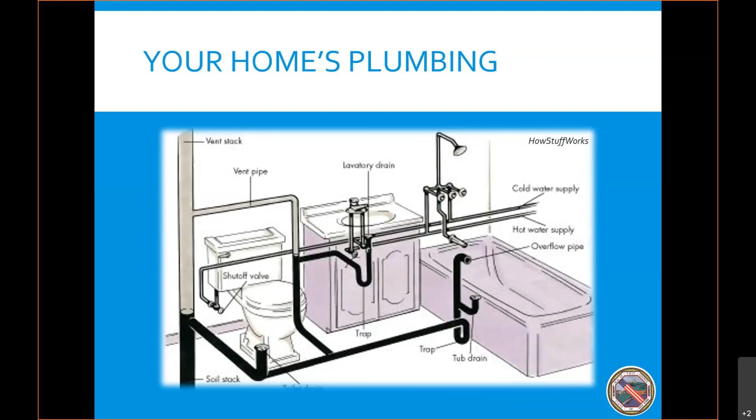The used water is collected through a drain system. The drain system, shown in black on the figure here on the screen, is a series of pipes from all of these sources that combine together into a single, slightly larger pipe that exits your home. That single pipe that exits your home is referred to as your house or sewer lateral, which is shown in this figure exiting in the basement area of the home.

How many of us have spent time thinking about their sewer lateral? If you haven't had any problems with it, most probably spent 0 time thinking about it. The lateral in most municipalities is private, meaning that it's owned by the homeowner, and that's because it services a single residence. In modern days, that sewer lateral is typically connected to either a private septic system or, for most of us, a public sewer system.

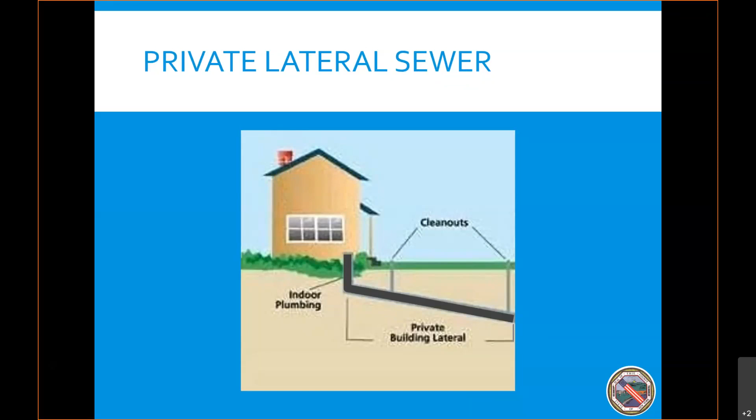That is in today's world, but before I go any further, I'd like to go back 167 years. In 1854, London had an infamous cholera outbreak that forever changed the course of health and science. At the time, experts were not certain of the cause of the cholera outbreak in the city. Due to the stench in the area, it was theorized by some that the disease was airborne.

It was not until Dr. John Snow meticulously traced the cases of cholera and observed certain patterns using his information gathering and mapping techniques that the epidemic was better understood. Dr. Snow had figured out there was a tie with human waste and drinking water sources.

The famous removal of the handle of the Broad Street pump, still memorialized in London today, was a major way of fighting against the epidemic and is often cited as the start of what's referred to as the sanitary revolution. Many consider Dr. John Snow the father of epidemiology.

And that does not include other diseases that are typically waterborne, such as dysentery and typhoid fevers, or those that were classified as unknown at the time. The 520 deaths equates to approximately 0.7% of the entire population dying of a single disease in a single month. In today's numbers, that would be over 6,400 people dying of the disease in Erie County in a 30-day period.

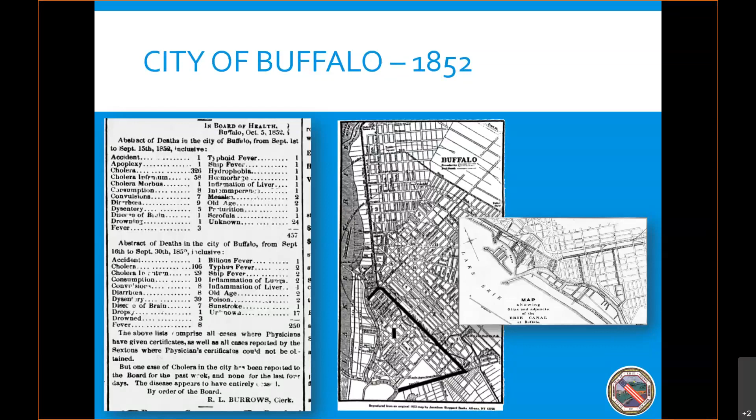This is all because societies had grown and were living in closer quarters. With these large concentrations of population, proper protections from pollution associated with human waste had not yet been enacted. But getting back to that private lateral I referred to earlier, with advances in the understanding of disease, in the late 1800s, it was determined that the waste from homes needed to be redirected away from water supplies.

That was the start of sewer systems, a network of pipes that collect the flows from individual properties and take them to another location. In the early days of sewers, oftentimes those collected flows were directly sent to streams and rivers. Water supply locations were then strategically selected to be away from these discharge points, the best they could. It was a common thought that dilution could be the solution to pollution.

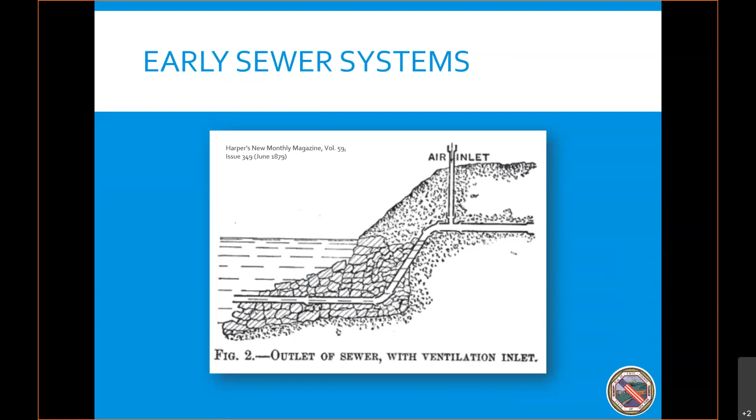But while that's a catchy rhyme, dilution being the solution to pollution only went so far. As populations grew, the concentrations were such that waterways were highly impacted. In the early 1900s, the city of Buffalo was cited as the main source of intestinal disease in both the United States and Canada downstream of the city along the Niagara River and heading towards Lake Ontario.

In 1907, the city of Niagara Falls had the highest death toll of typhoid fever in the world, which was attributed primarily to the growth of the city of Buffalo. Think about that. That was in the 20th century, not very long ago at all. Pretty incredible. There were disputes because of these impacts.

Can you blame people? And to the point where King Edward VII of England, representing Canada, and President Howard Taft, representing the United States, signed a Boundary Waters Treaty to address these types of issues. The result was the formation of an International Joint Commission to study and enact policies regarding these shared waters. The commission is still in place today.

One of the main advancements locally to improve the shared waters was the formation of the Buffalo Sewer Authority to capture those direct discharges to waterways and provide a basic level of treatment. The primary focus was disinfection.

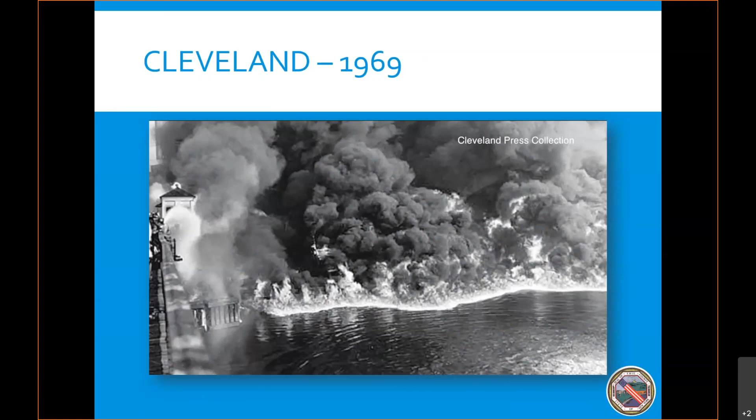The Cuyahoga River was not the only water body to catch fire. Although less publicized, the Buffalo River also caught fire in 1968. There was so much oil and grease on the river that a worker accidentally ignited that blaze with a workman's torch. This wasn't a brazen act of vandalism or anything intentional. It was simply the conditions were so awful that a normal activity could cause the fire.

That same year, the Federal Water Pollution Control Administration described the Buffalo River as a, quote, repulsive holding basin for industrial and municipal wastes, unquote, and essentially that it was devoid of oxygen and almost sterile. This reputation started to become more publicized a few years earlier when President Johnson visited Buffalo in 1966. At the meeting, President Johnson was presented a bucket of sediment and of water from the Buffalo River and was given a big spoon to stir it with.

Can you imagine that being done with the president in today's age? When that occurred, Mrs. Johnson recoiled from the smell, and the president was disgusted. LBJ's response was fairly simple. Don't worry, I'll take care of it. The same year, Senator Robert Kennedy toured the Buffalo River and was quoted as saying, "This is as bad as anything I have seen."

Of course, the Buffalo River connects near the terminus of Lake Erie, and poor Lake Erie. In the 1960s, several national publications declared Lake Erie dead due to toxic algal blooms that had depleted oxygen and would not allow fish to survive. It was so bad that when Dr. Seuss wrote the Lorax in 1971, of all things he could have chosen as an environmental problem, he used Lake Erie as an example.

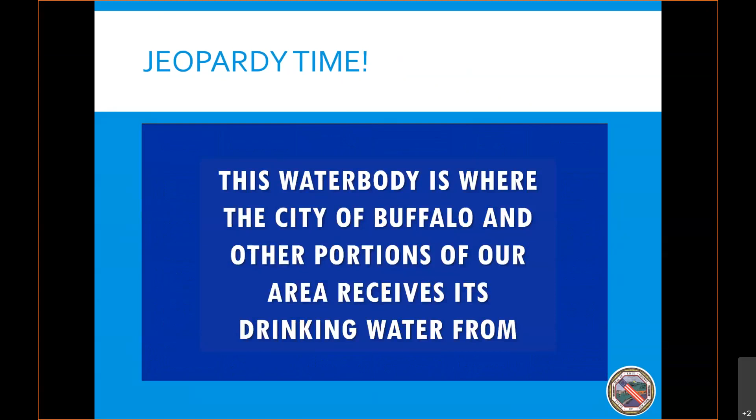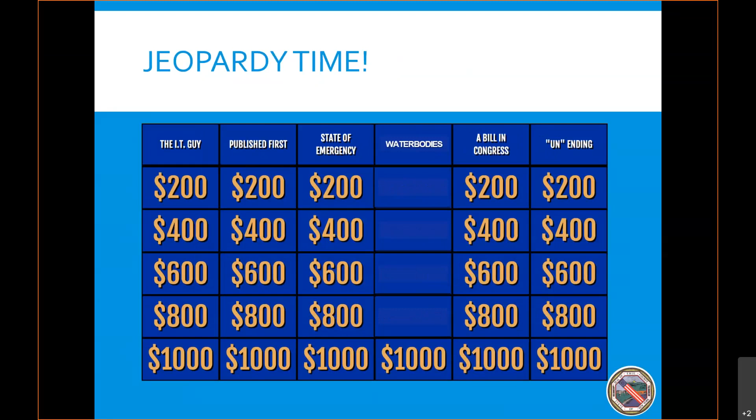How about water bodies for 800? Evangola and Woodlawn Beach State Parks are located on this water body. Starting to notice a pattern. Let's close out the category, water bodies for 1,000. Chris Hoover of Fishing League Worldwide stated this water body was the #1 smallmouth bass fishery destination in the United States. Even if you do not know Chris Hoover or Fishing League Worldwide, hopefully you can answer this one based on the previous questions. The answers of all of them were Lake Erie.

Our county is named after it. It is our drinking source. It is critical to commerce and economic development. It is used for beaches and recreation. It is a world-class fishery. It is amazing that in the 1960s and before, we allowed this tremendous asset to deteriorate into such sad shape.

By the mid-1960s, momentum had been swinging to address these problems. During President Johnson's previously referenced visit to Buffalo, he committed to quick and decisive action to save the Great Lakes. During a rally in Niagara Square that day, he was quoted as saying, "Lake Erie must be saved. This great inland sea will sparkle again." The decisive action came after LBJ's presidency with the passage of the Clean Water Act.

Quoting portions of the act directly, the Clean Water Act's stated goals were to restore and maintain the chemical, physical, and biological integrity of the nation's waters, that the discharge of pollutants into navigable waters be eliminated, foster the protection and propagation of fish, shellfish, and wildlife, and provide for recreation, to prohibit the discharge of pollutants in toxic amounts, to provide financial assistance to construct publicly owned waste treatment works, develop and implement area-wide treatment management planning processes, initiate major research and demonstration, and develop programs for the control of non-point sources of pollution.

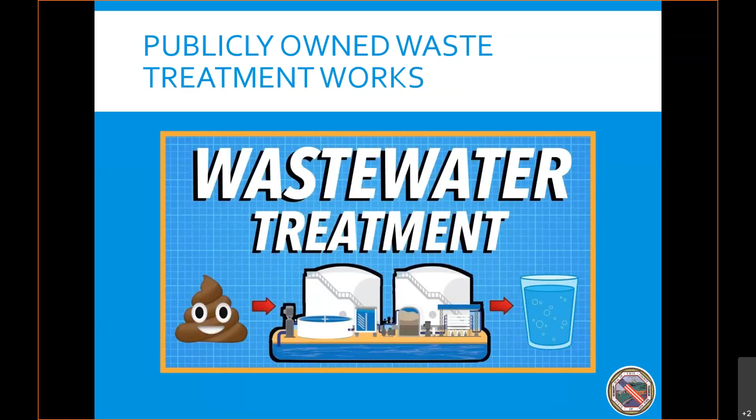Wastewater treatment plants are, quote, pollutant discharge elimination systems. The New York State Department of Environmental Conservation, or New York State DEC, issues state pollutant discharge elimination system permits to these facilities. And the permits are limitations that the facility must meet. Those limitations are determined by the New York State DEC, so the facility protects the uses of the water body it is discharging to. So, for example, you do not want a treated effluent from a wastewater treatment plant that is too acidic or too basic.

Therefore, one parameter that is monitored is pH, and the pH must remain between certain numbers. The limits are typically a pH of 6 to 9, with 7 being neutral. Another example, phosphorus was a key item included in many permits, particularly those discharging to the Great Lakes, because phosphorus was determined to be a main culprit to toxic algal blooms that had plagued Lake Erie for decades. For most large facilities, a limit of 1 milligram per liter for phosphorus has been set.

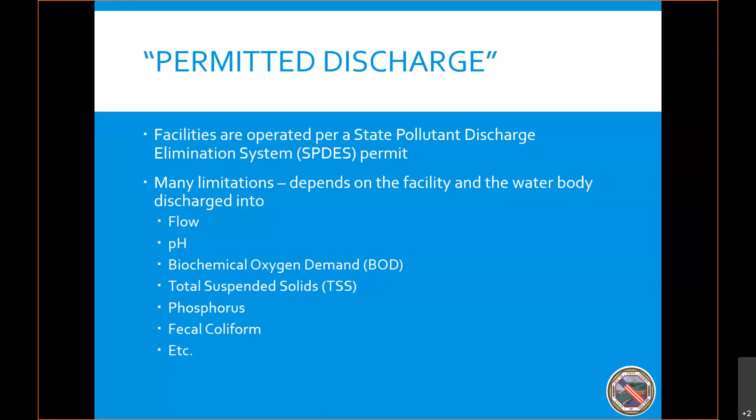There are numerous other items that are tested and monitored at these facilities. Simply put, these plants eliminate pollutants they receive. The permits enforce the Clean Water Act standards, are designed to protect the use of the receiving water, and the permits are what the facilities use to govern their operation. So what does it take to eliminate that pollution? In short, it is a complicated step-by-step process. Each system or facility is a little bit different, so for the purposes of this presentation, I'll provide general or typical examples of how these processes work.

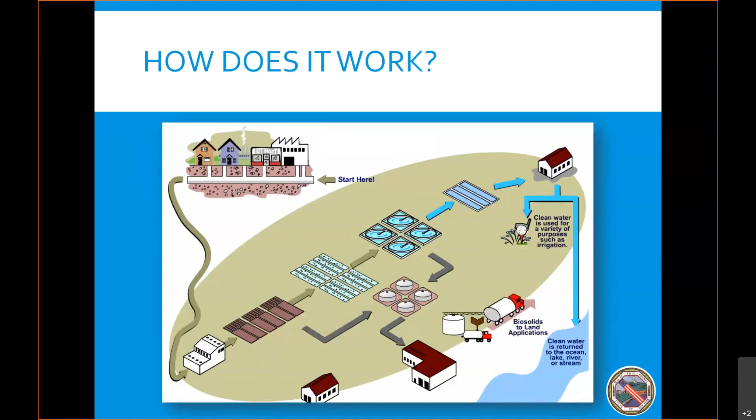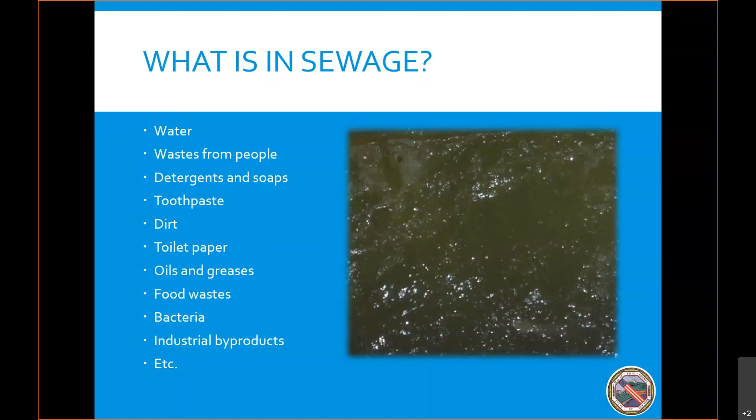Some people may ask, what exactly is in sewage? Well, here's a partial list. Primarily, there is water, and that is what we attempt to recover from this waste stream. There's the other stuff: waste from people, toothpaste, toilet paper, oils and greases, bacteria, industrial byproducts. Those are the items that could potentially harm our waterways and what is removed or eliminated through the treatment process. So what happens after you flush? Well, first, that used water coming from the private laterals is collected through a sewer system.

In most municipalities, there are two types of sewer systems in the road. One is referred to as the storm sewer system, which collects stormwater from the streets and other areas and conveys it to waterways. The second type is the sanitary sewer system, which is what your home's private lateral connects to and separately sends the collected sewage or wastewater to the treatment plant. There is one difference in Erie County. Within the city of Buffalo, there is what is referred to as a combined sewer system. What that means is the same pipes handle both storm and sanitary services.

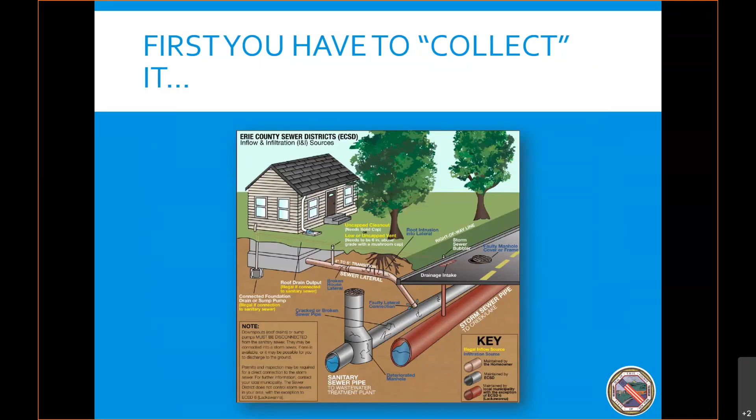The sewage within sanitary sewer pipes generally flows by gravity. What that means is the pipe is gently sloped downward, with the sewage flowing from the higher point to a lower point. To provide access to the gravity sewer system, there are manholes in the streets. As these pipes combine with pipes from other areas, the sewers become bigger and bigger.

For those on the computer, what I'm going to do now is show some video footage from televising work we perform in the sewer systems. Yes, we do send video cameras into sewers. In fact, these cameras can cost over $100,000 to procure. We have a crew that is on the road almost every day performing televising work to assess the condition of our sewers, see if there are problems, and more. There's not anything remarkable about this particular sewer section.

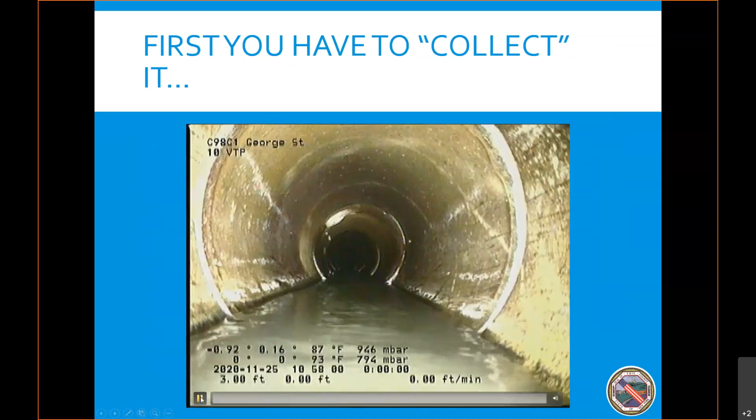It is a 10-inch diameter vitrified clay tile sewer, a pipe material that is hardly used at all anymore. I believe this sewer is approximately 70 years old. So just let me hit play here. So the camera is actually on crawler tracks. It almost looks like a tank as it's going through the sewer. The camera operator can pan and tilt and zoom in on different features depending on what they're looking at.

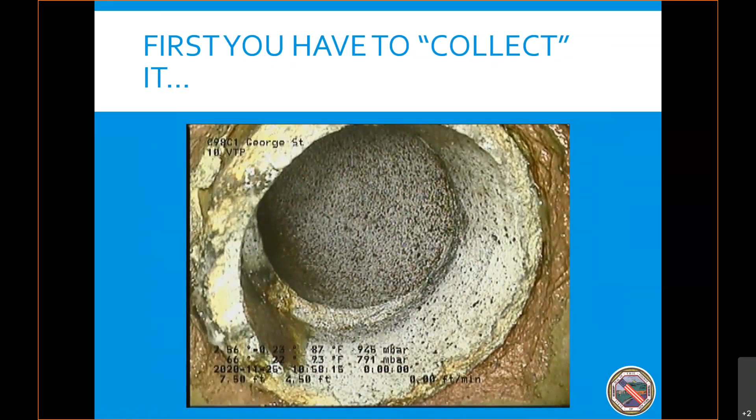So for those looking on the screen, you'll note that the camera operator has classified this as a tap break-in inactive at 10 o'clock, 10 o'clock being the location of where that tap is. I'm going to pause this video here for just a second. On the right-hand side of the sewer, you can see there's some things that are sticking out of one of the joints of the pipe. Those are actually tree roots.

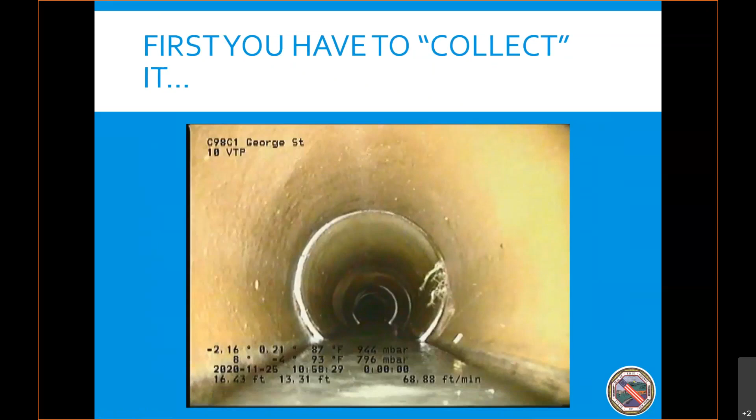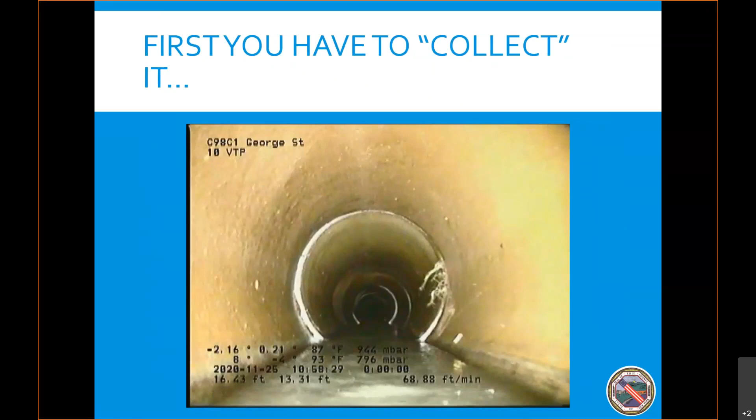Tree roots attempt to find water, and of course there's a continuous water supply in sewer systems. In this instance, those are very, very minor and really aren't of concern to us, but there are times in which tree roots can completely block the entire flow. And we actually have specialized equipment that can be used to remove those tree roots and make sure that they don't cause further damage. So see the camera continues to move along. If there are any cracks or sags or collapses, the camera operator would be noting that.

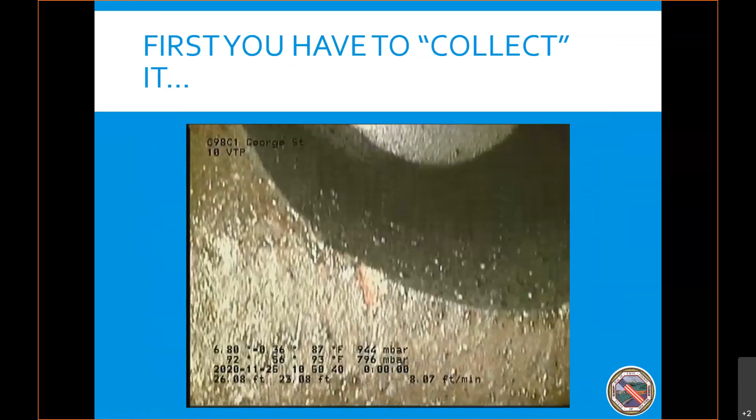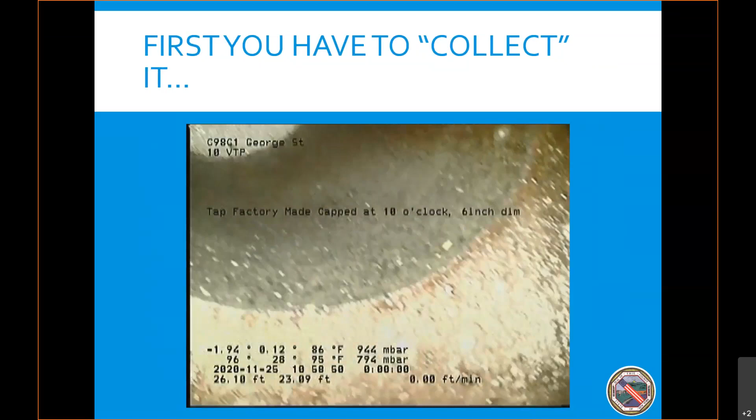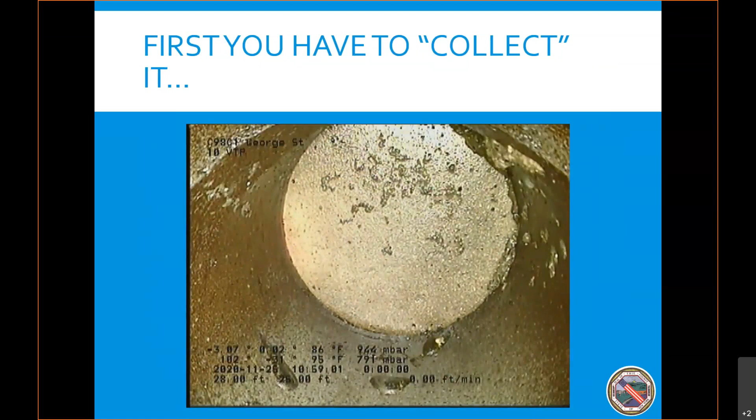Next, we panned and tilted up to another potential feature. In this instance, this is referred to as a factory tap, and it's capped, meaning that it actually is not connected to another home. Same thing on this location. If the cap was not there, or if it was leaking, we would note that, and we'd come back and perform a repair on the sewer at that location.

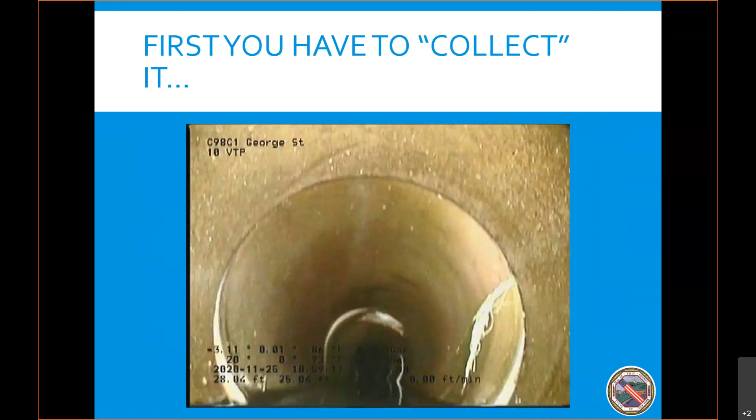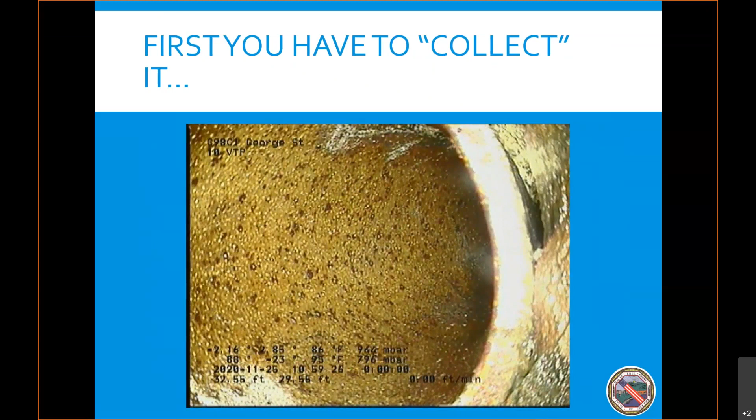Coming up, you can already see another minor root, followed by another connection here. This is actually an active connection because you see there's a pipe that you can look further up into there. So our camera operator will note that that's an active tap. Hopefully we'll see that on the screen momentarily. Yep, right there. And it's at the 2 o'clock position on the pipe.

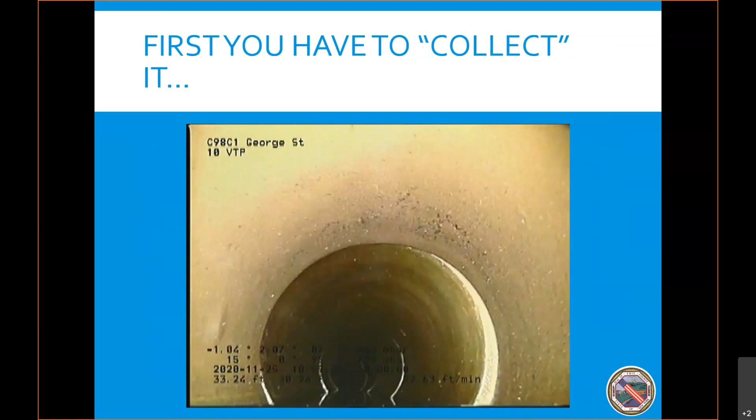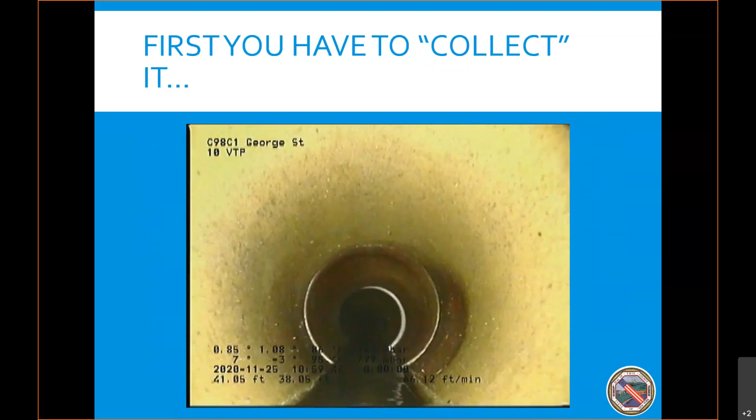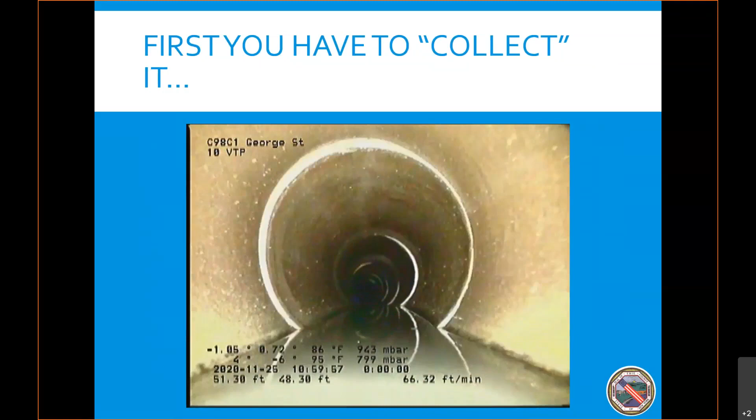Some other things that you note is that there are joints every roughly 3 feet as you're going through there. That's an older installation. Newer pipe sections are typically made of plastic, or what's referred to as PVC, and those joints are much longer than that. Joints are a potential area where there could be a failure in the pipe, also where we could have groundwater leaking into it, which is not a good situation at all.

Although the goal is to have everything flow by gravity, the natural terrain, creeks, and other geographic features sometimes make gravity flow infeasible. In those instances, the most common way to address it is by an installation of what's referred to as a pumping station. Think of a gas pump. There's a tank in the ground and a mechanical system to raise the gasoline to a higher level. Wastewater pumping stations also have tanks in the ground with pumps connected to them to move the sewage to either a higher level or another location. Unlike the gas pump, sometimes the discharge location can be several miles away.

The Erie County sewer districts are responsible for approximately 100 wastewater pumping stations scattered throughout our area. These facilities range in size from those that can pump relatively small amounts, say 20 to 30 gallons per minute, to those that can pump millions and millions of gallons per day.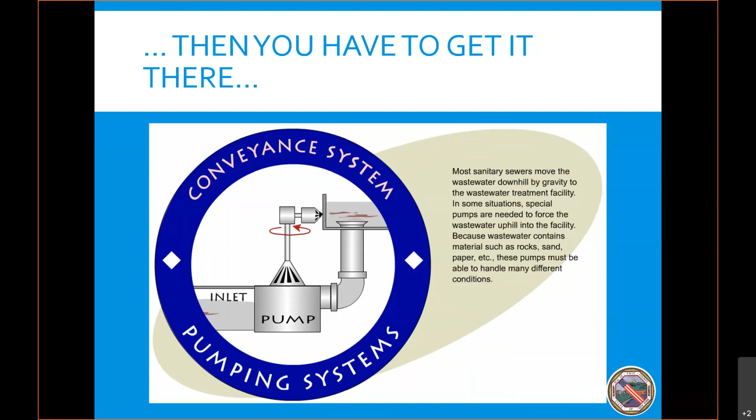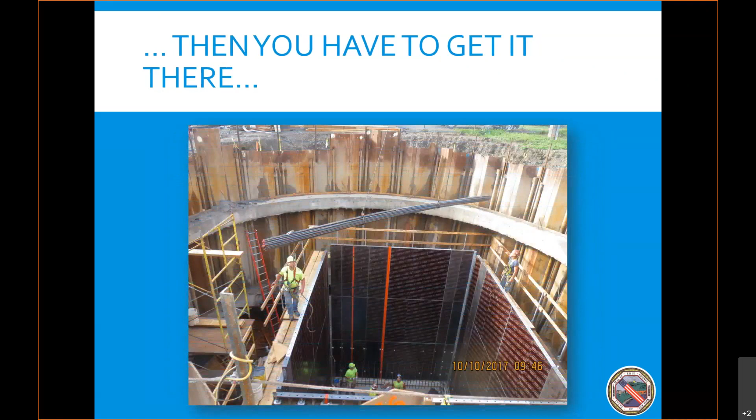This picture is from the construction of the facility. As you can see, an enormous hole needed to be dug, and quite deep, roughly 30 feet. You can tell by the perspective of the worker at the bottom of the hole in comparison to the length there. The main structure constructed here was the wet well for the pumping station. The wet well receives the sewage, and in this type of pumping station also houses the submersible pumps inside. 3 pumps are installed, as you can see, 1, 2, 3.

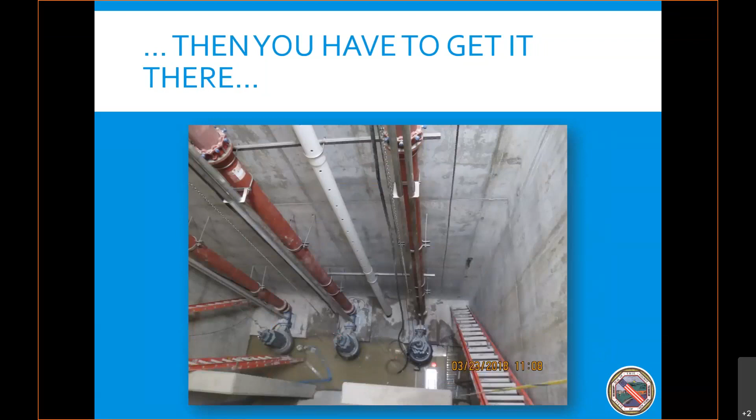And 2 of which are needed to handle the peak flows, and the 3rd is there for redundancy in case there are problems. Here's another view. The peak flow of these two pumps operating is approximately 4.6 million gallons per day, or roughly 3,200 gallons per minute. To put that in perspective, this station could empty an Olympic-sized swimming pool in less than 3.5 hours. This is not even close to the largest pumping station the county owns, operates, and maintains.

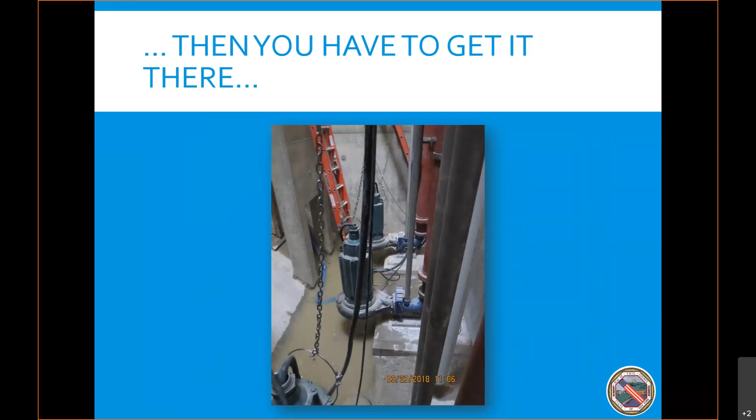In fact, one of the most challenging aspects of this construction project was this was a pumping station replacement, meaning wastewater service needed to continue despite the significant construction work occurring at the site. For those that may be asking, the total cost of construction for this pumping station was almost $3 million.

Once the flows make it through the sewers and pumping stations and enter the treatment plant site, the first step is what's referred to as preliminary treatment. Preliminary treatment removes large debris up front to protect the equipment within the wastewater treatment plant.

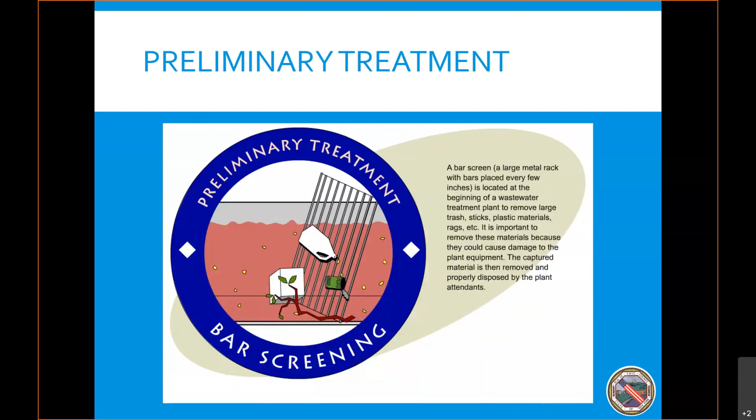Just cue up the video here. Here we go. Internet is going very slow right now.

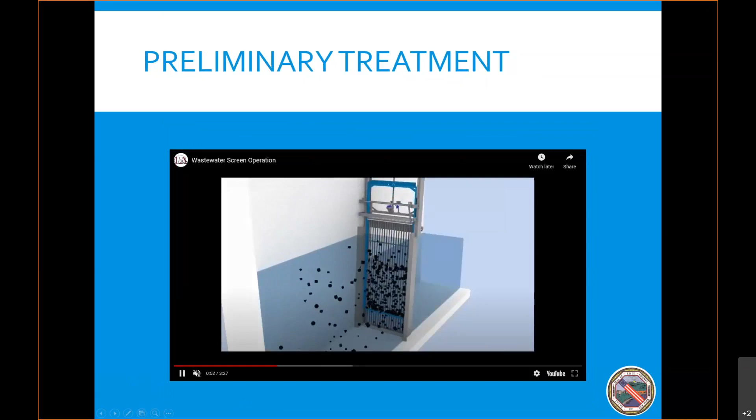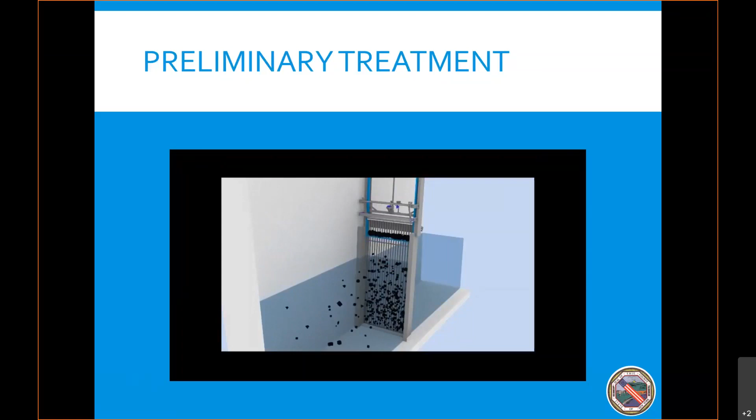There we go. This video provides a schematic of the most common preliminary treatment device, a screen. The typical screen configuration includes a series of thin metal bars placed in the wastewater flow stream where larger debris gets caught. You can see that by all the black specks on the schematic here. As the screen could be clogged, there's a scraper or rake mechanism that removes the debris from the screen so that there is no backup.

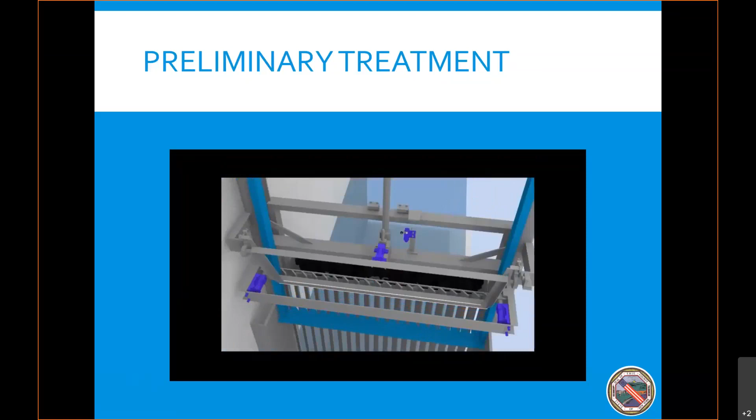The debris is typically conveyed into some sort of hopper or compactor, which I believe is going to be shown right about now. You see the debris is removed and goes into the hopper, and that is subsequently disposed of in a dumpster. And then the rake goes back down and removes additional debris so that it does not clog the screen.

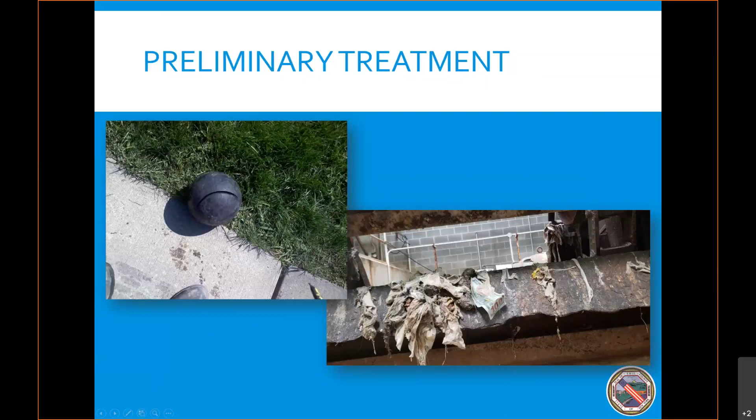After preliminary treatment, the next stage in the process is what's referred to as primary treatment. There are two main functions of primary treatment: to have solids sink to the bottom and to have oils, greases, and other floatables rise to the top. The solids that sink to the bottom, referred to as sludge, and sludge looks like it sounds, are disposed of through other processes in the treatment plant. Similarly, the oils, greases, and other floatables, also referred to as scum, and we have very glamorous terms in the wastewater business, that scum is skimmed off the top and also disposed of.

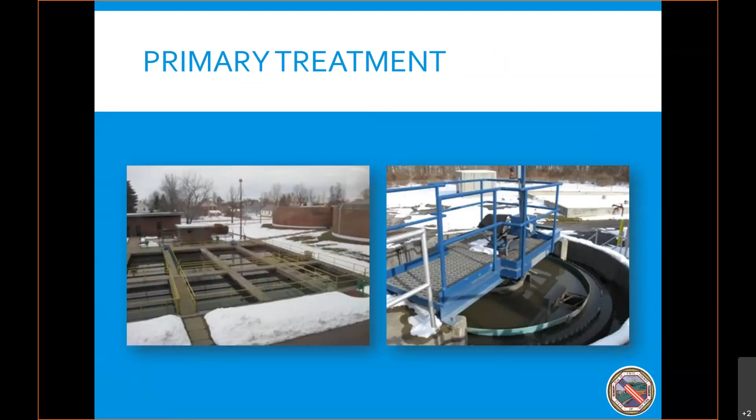The typical means to conduct primary treatment is with equipment referred to as clarifiers. They are essentially large tanks, some circular, others rectangular. On the surface, it does not appear that there is much going on. However, there is a significant amount of equipment that is required to optimize treatment. For simplicity's sake, I will focus on the circular style clarifiers.

Influent sewage enters in what's referred to as the center well, so it comes up through here. The flow disperses from the center, which you can see from the arrows on the figure. The tanks are sized for the expected peak flows and the expected makeup of the sewage to promote settling of solids. The solids settle on the bottom. On the bottom is a scraper mechanism to collect the sludge.

At the top is something referred to as a baffle. What that baffle does is keep the floatable material in the center, while allowing the cleaner effluent to exit through the sides. There's also what's referred to as a skimmer at the top that will collect those floatables and that scum. The sludge and scum are disposed of, and the rest of the effluent goes on to the next step.

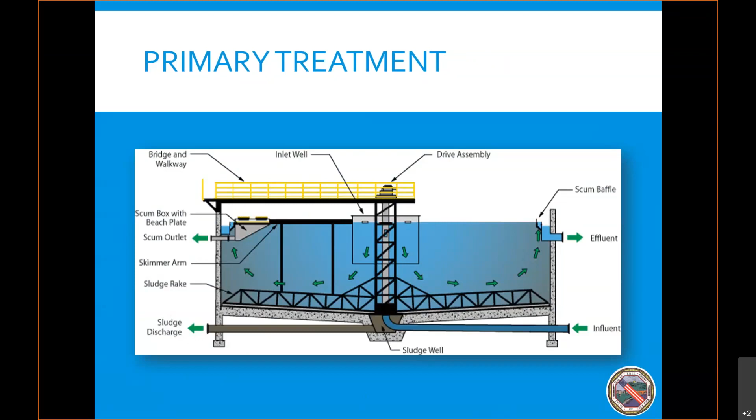Before the Clean Water Act, many treatment plants consisted of preliminary and primary treatment, sometimes followed by disinfection. The Clean Water Act brought forth widespread integration of what is referred to as secondary treatment. There are a few types of secondary treatment processes, but for this presentation, I will discuss the most widespread, the activated sludge technology.

Much of what is done at treatment plants is taking what happens in nature and speeding it up. There are bacteria and other microorganisms in nature that, quote unquote, eat organic materials, nutrients, and solids over time. Many of these microorganisms are found in nature and are also present in sewage. In the activated sludge process, we create environments ideal for the microorganisms to consume those materials so those pollutants may ultimately be removed from the sewage. One of the ways is by mixing and aerating the waste stream and engineering the facilities such that optimal pollutant removals can occur.

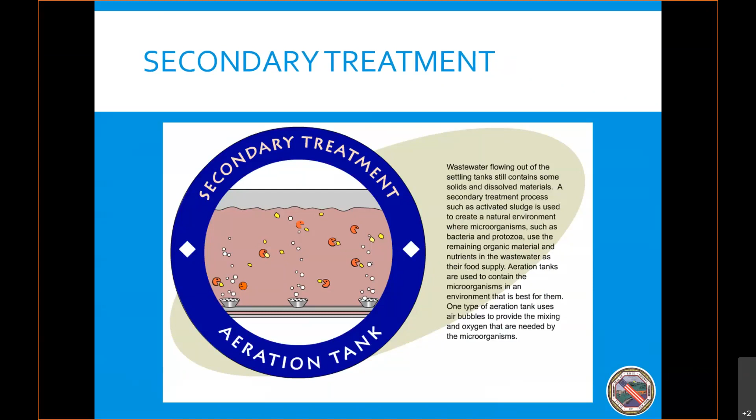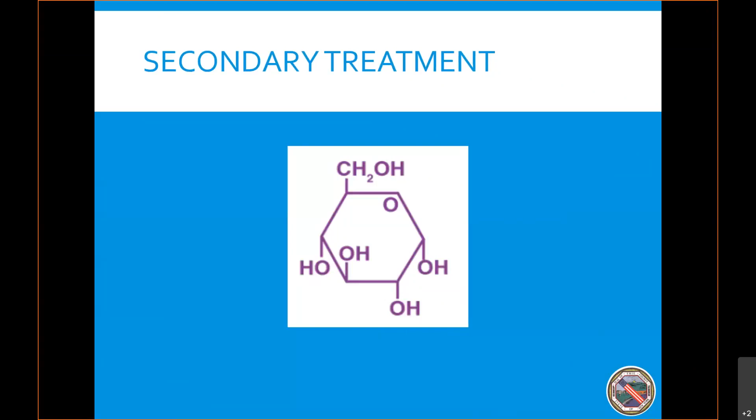So what are some of the examples of pollutant removal? I'll ask you all to remember back to high school chemistry class. Do you recall what this nasty looking molecule is? Well, it's not nasty. It is glucose, or common sugar. Think about a glass of water. If you pour some sugar into it and stir it around, what happens? Well, it dissolves and you do not see the sugar anymore. However, just because you cannot see it does not mean it isn't there, as evidenced by the taste when you drink that same glass of water.

There are plenty of dissolved components in wastewater that need to be removed. In the example of sugar or glucose, it is a fairly simple reaction promoted by the microorganisms in the secondary treatment process. Again, harkening back to high school chemistry class, glucose has the molecular formula of C6H12O6. As I noted earlier, this example of secondary treatment process includes aeration to make sure there are proper levels of oxygen, or O2, in the environment. Just like we breathe in oxygen and use it for bodily functions and exhale carbon dioxide, microorganisms promote similar reactions in the process. So as you can see, C6H12O6 plus O2 yields carbon dioxide and water. There are thousands and thousands of these types of reactions in the secondary treatment process that eliminate pollutants and produce a cleaner water.

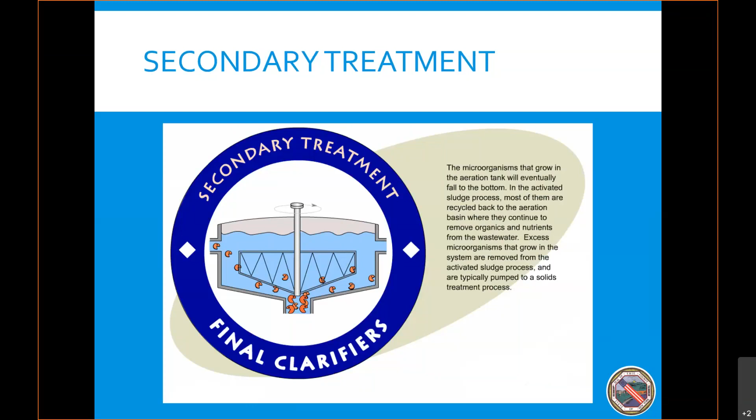After aeration and mixing have stirred up the processed liquids, the next step is another stage of clarifiers to remove solids, or the sludge, remove the floatables, or the scum, and allow the cleaner water to proceed to additional treatment. The setup is very similar to the clarifiers described earlier. The tanks are sized for the expected peak flows and the expected makeup of the sewage to promote settling of solids. At the top is a baffle that keeps the floatable materials in, with a skimmer arm to collect those floatables. At the bottom is a scraper mechanism to collect the sludge. In some clarifiers, chemicals may be added to assist with settling the sludge or removing additional pollutants.

Let's hit play one more time. Sorry about that. Video stopped.

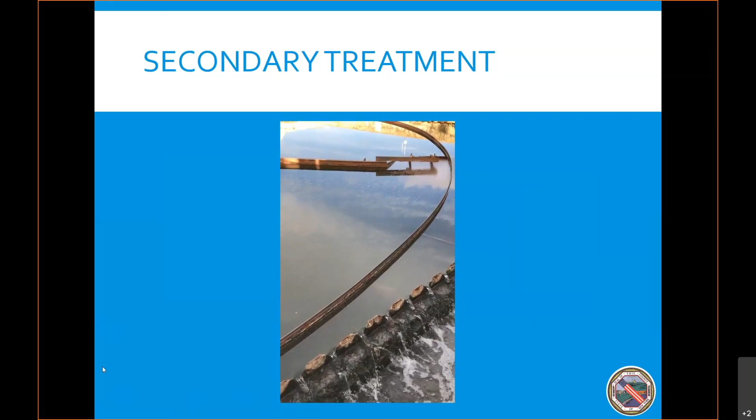Below the surface, solids are settling and sludge is collected as well. And you can see the cleaner water overtopping the weirs in the lower right-hand corner. For some facilities, there is an additional polishing step required after a secondary treatment process, referred to as tertiary treatment. Generally, tertiary treatment entails the addition of a filtration step.

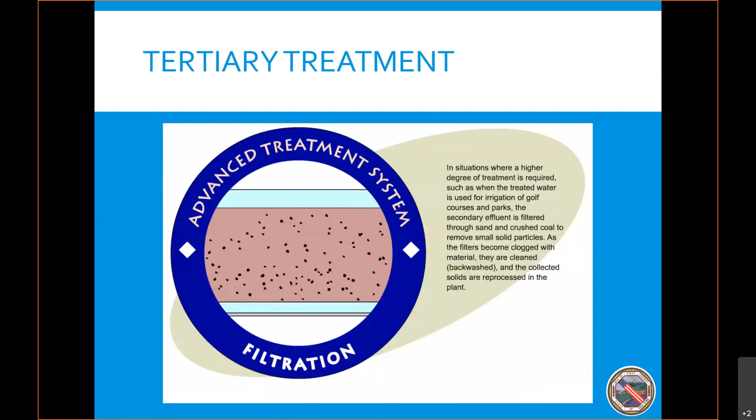Cue up this video. Again, internet's a little slow today.

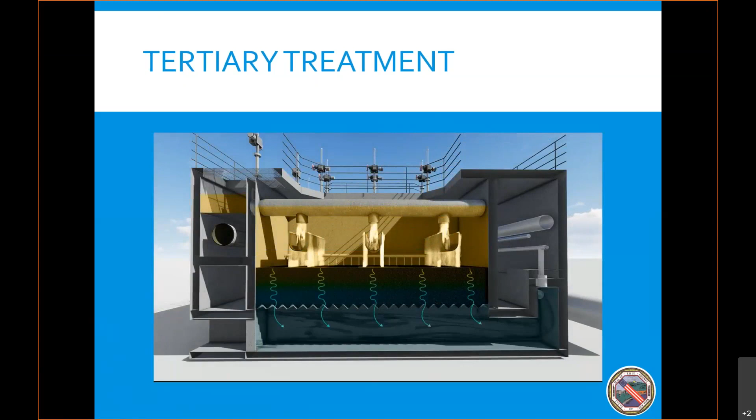Okay, great. Similar to a swimming pool, the water is sent through some sort of filter material. So you can see at the top here, water is accumulating. And then it will slowly make its way through the filter material. Small solid particles will be kept in the filter while the cleaner water flows through. I'm going to rotate the view here.

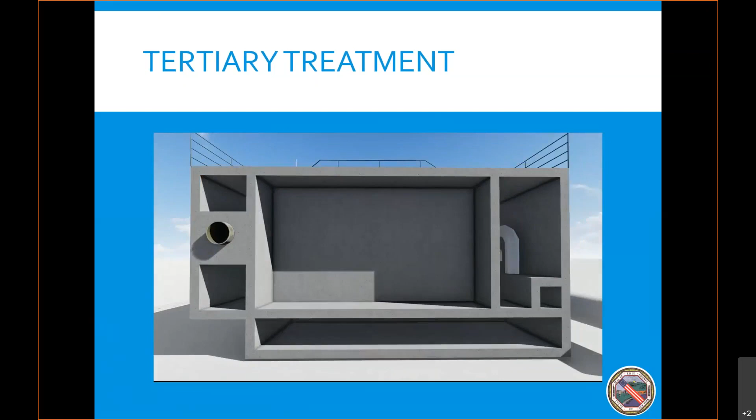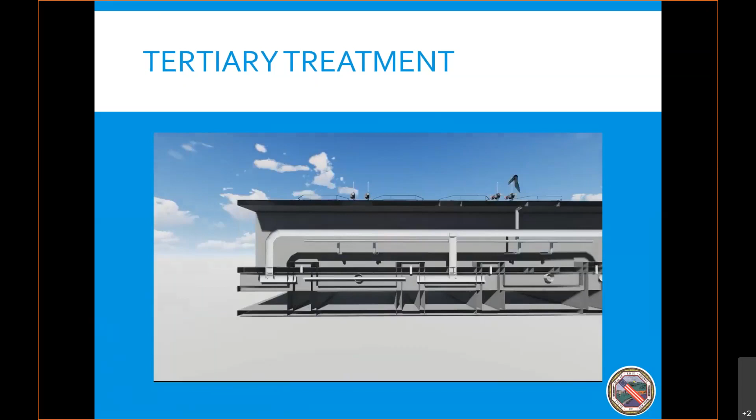So periodically, you'll need to backwash the wastewater filter. Again, similar to a pool filter. Water will be sent up through the filter material itself. And you'll see here that the solid particles then come up to the top. And then that's flushed away. And that filter backwash is then sent to the beginning of the treatment plant so that it could be properly cleaned.

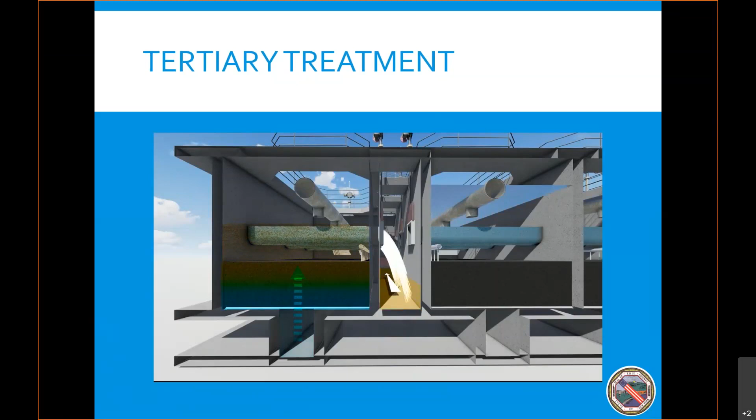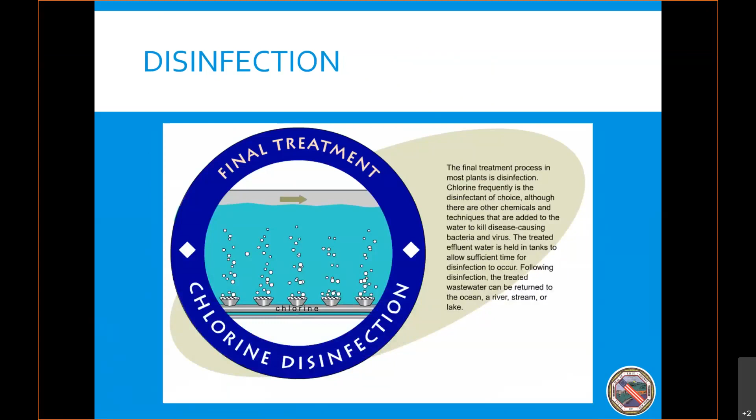In the secondary treatment process, the bacteria and other microorganisms were critical for the removal of pollutants. However, as we discussed at length earlier in the presentation, bacteria in high concentrations in our waterways contributed to significant illness. Therefore, the final step in the process is disinfection. The most common disinfection method is chlorination. Again, similar to a swimming pool, chlorine is added to the water to oxidize the bacteria, viruses, and other microorganisms.

Another disinfection technology used in our industry is ultraviolet or UV. Have you ever heard the phrase sunlight is the best disinfectant? There is both a metaphorical and a scientific basis behind that quotation. When on the Supreme Court, Justice Brandeis used this phrase to highlight how publicity and transparency can combat corruption. In nature, sunlight is indeed very effective at killing bacteria and viruses.

UV disinfection equipment produces certain wavelengths in the UV spectrum and shines that light into the effluent. The UV light alters the DNA of the microbes, and by altering the DNA, the microbes cannot reproduce. Therefore, the colony dies off.

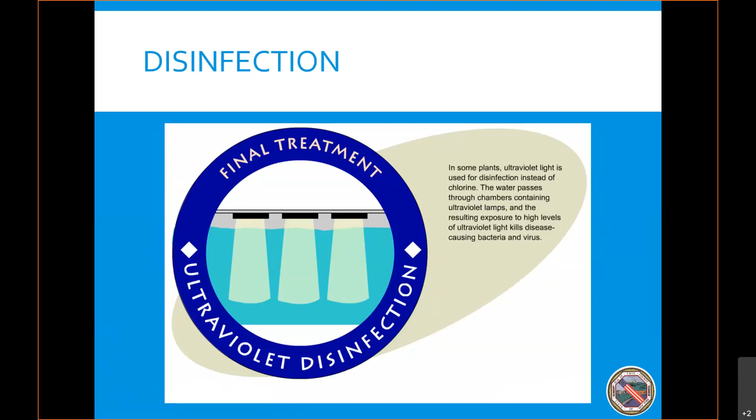The final step is discharge to our natural environment. We no longer call this wastewater. Instead, we refer to it as treated effluent. This treated effluent has been cleaned to meet stringent standards to be protective of the designated uses of the water body. In this instance, Lake Erie is used as a drinking water source, for fishing and recreation and more.

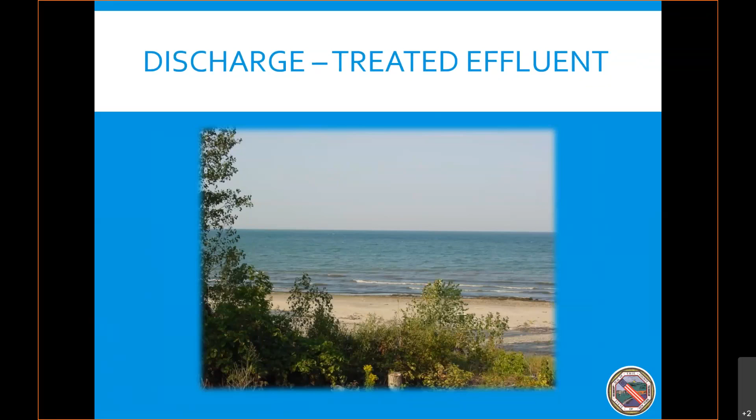Wastewater treatment plants are being rebranded. And did you know that the sewer business needed to be branded in the first place? The new terminology being used is water resource recovery facilities. If you think about it, that makes sense. These plants receive the sewage, and what they do is recover clean water so that it may be returned to the environment. Water is a precious and finite resource, and hence should not be quote-unquote wasted. Therefore, these are water resource recovery facilities. That being said, despite my best efforts, my friends still refer to them as poop plants.

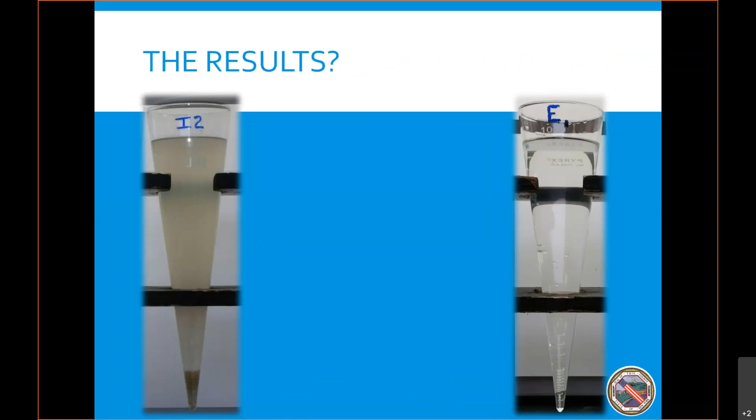These images provide a visual contrast between the influent raw sewage on the left and the treated effluent on the right. As we discussed earlier, there's a lot you cannot see: the removal of dissolved components, bacteria, and more. That also differentiates the two waters. Nevertheless, a fairly striking difference, right?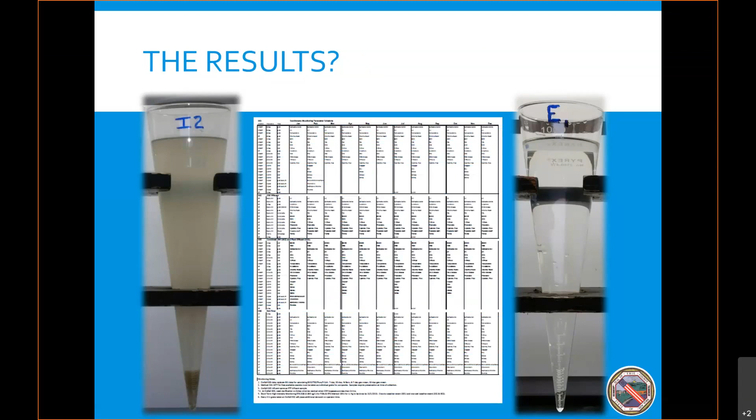One item I did not cover is what happens to the solids or sludge collected at the bottom of the clarifiers. Well, there's a whole other process to handle the solids for proper disposal. A big part of this is removing water from that solid stream. Again, these are water resource recovery facilities. But on a practical basis, whether the final disposal is land application, incineration, composting, or landfill, the more water in the material being disposed, the more expensive it is.

One interesting aspect of the solids process is that you can actually generate energy. How so? Well, certain facilities have equipment and tanks that are referred to as anaerobic digesters. The digesters are designed to maintain temperatures between 95 to 100 degrees Fahrenheit, to be completely mixed, and to have no oxygen. Very similar to the human digestion system. Also similar to the human digestion system, solids are broken down, and one of the byproducts is, well, gas.

Methane, to be precise. Some facilities can burn that methane to heat their boiler systems or to even power an engine to produce electricity. There are facilities that have started to accept food wastes and other organics to feed into their digesters and produce even more energy. Some farms even use this technology to manage manure.

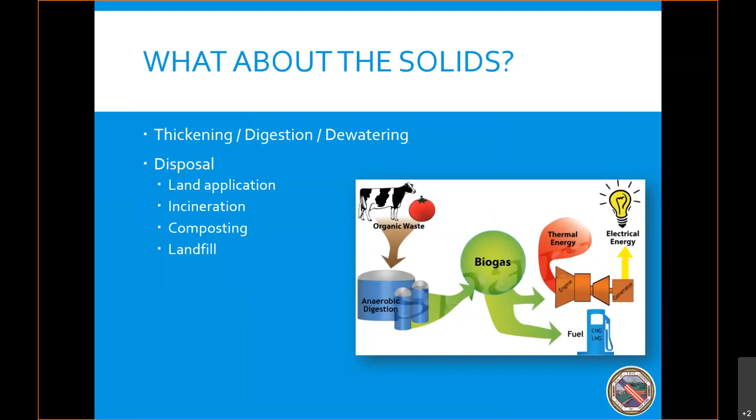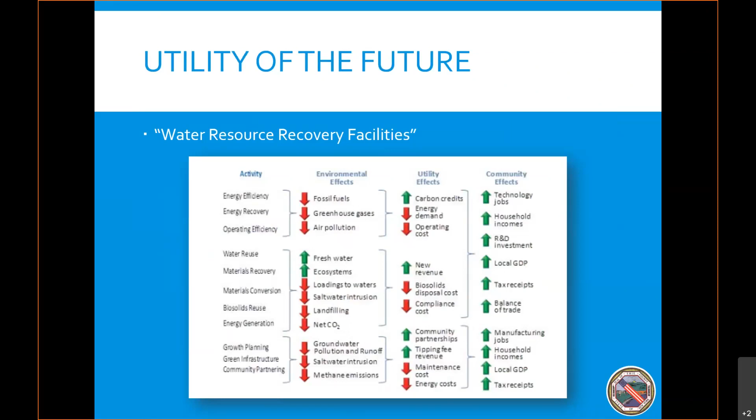Water resource recovery facilities are named as such because clean water is recovered from the sewage. But the example of anaerobic digesters demonstrates there are other resources that can be recovered. There's a lot of emerging research on how these facilities can transform into utilities of the future to continue protecting waterways, but also manage the entire process to maximize the community benefit. Production of energy, capturing nutrients, reducing electrical loads, utilizing treated effluent for other purposes. These are all ways sewer utilities are working to do more at and with these facilities.

So now that you've heard about the history, the process, and how everything works, I'd like to go back to the beginning of the presentation where I asked what or who is a polluter.

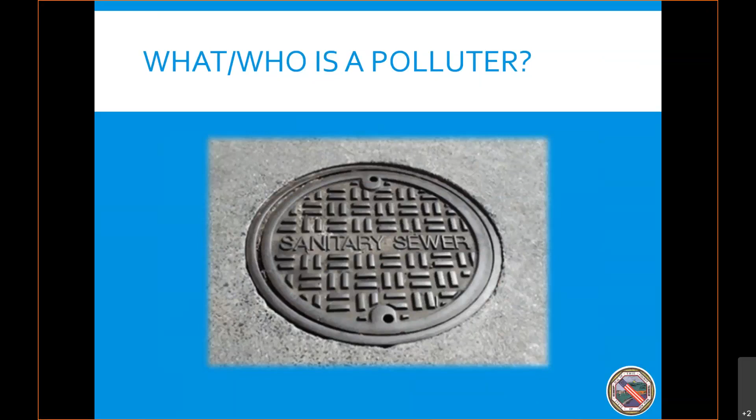How about these two? The point of this slide is that all of us, children, teenagers, adults, we all utilize water for various purposes, and the used water that goes down the drain is pollution. That doesn't make us dirty. In fact, it's a big part of keeping us all clean. But we need to understand our role in dealing with that pollution.

So what are our responsibilities as polluters? First, we need to make sure we responsibly pollute. One major challenge sewer service providers face is when people put things down the drain or into the toilet that they should not. And I'm not just talking about the bowling ball from earlier. I think you all can handle that.

For example, only the 3 P's, poop, pee, and toilet paper, should be flushed down the toilet. Why? The sewer pipes, pumps, and other equipment are not designed to pass many of those other items. And those other items could be things like wipes, paper towels, and other similar cleaning products.

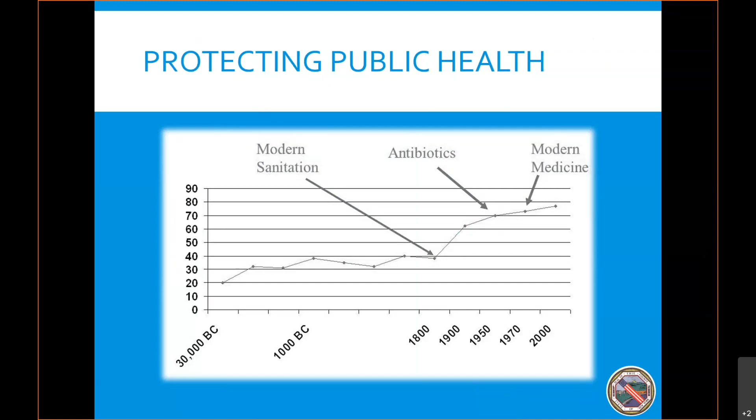The reason sanitation was selected, well, if you look at the life expectancy before advances in sanitation, the average lifespan was around 40 years, as you can see here on the chart. From the late 1800s into the 1900s, life expectancy increased roughly 50% to over 60 years of life expectancy. And that was in large part due to the implementation of modern sanitation. Sewer services were critical to that advancement.

Besides the critical role in protecting public health, I hope you all will also think about protecting the environment when thinking of sewers. In the early to mid 20th century, our waterways were in deplorable condition. In the last 50 plus years, we have seen tremendous advances. No longer is the Buffalo River devoid of life and ready to start on fire. Now it is an area people gravitate towards to have fun, for recreation, and more.

Now, by no means are waterways perfect. I hope that is not a takeaway. There are still problems, and hence there is still much work to do. But we must acknowledge how far we have come and that the investments put forth have made meaningful improvements.

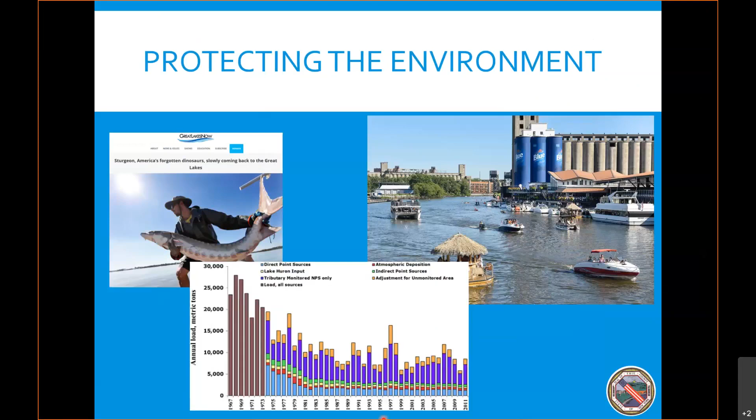Did you think of making Erie County greater when you answered the question earlier? This is the oldest report in our division's library, Progressive Sewer Systems for a Greater Erie County. Before there was an Erie County legislature, the county was governed by a board of supervisors. After World War II, the Board of Supervisors saw the uncoordinated, uneconomical, and unsatisfactory manner in which sewer services were being handled as a major problem, and one of which would limit our area if not addressed. This business is not glamorous, but it is important. What resulted was the formation of the Erie County Sewer Districts a few years later.

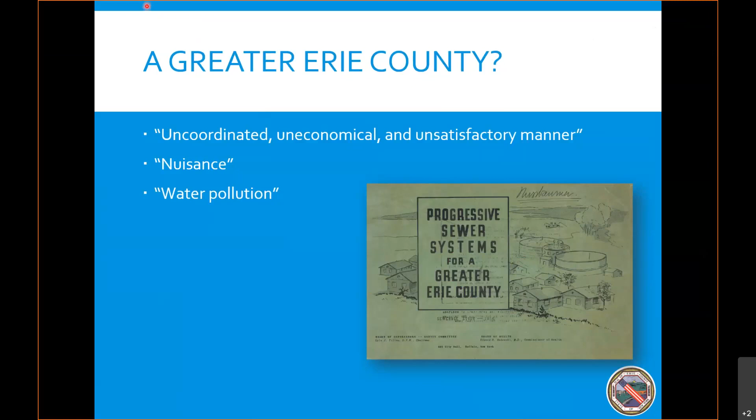So, what happens after you flush? In short, a lot. I hope you gained a better knowledge and appreciation for the wonderful world of sewers and water resource recovery. Thank you.

Thanks, Joe. That was awesome. Thanks. Great information, great jokes, and we have a lot of questions here, so we'll see how many we're able to get through. I'll give you a second before I toss them your way. Thank you.

So the first question: is there any ongoing maintenance that we should be doing for our laterals, and what are the warning signs that it's about to blow? It's a great question. So depending on the age and the condition of your lateral, there can be different maintenance that can be performed. If your house was constructed probably before the 1980s or the 1970s, most likely your lateral is constructed of either vitrified clay tile or another similar type of material. That'll have the shorter lengths of pipe with the many joints that I referred to, and that can cause issues with regard to roots getting in there and other sorts of things.

So sometimes what folks will do as maintenance is they'll have a plumber come in and check their lateral. They have cameras that they can use to look through it. They also have root cutting equipment if they do have a backup. The other thing is oftentimes in either yards or sometimes outside of the cellar wall, there will be a vent. You want to make sure that remains clear so that sewer gases can be vented into the air as opposed to making their way into the houses themselves.